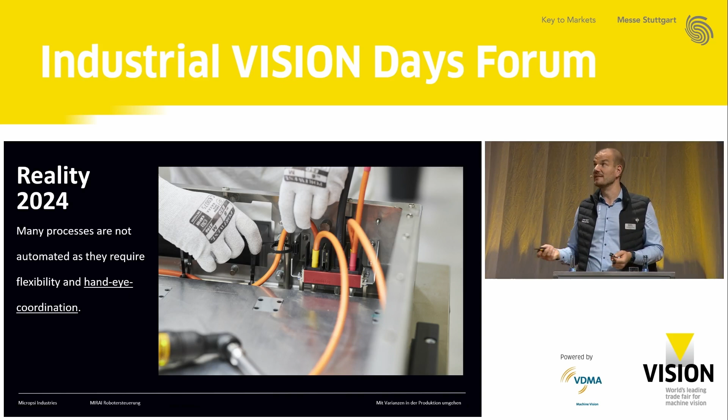How do we call our solution? Mirai. Mirai, in many Asian languages, means something like the future - different pronunciations, Mirai. But what we call it, why we call it Mirai, is because it stands for Micropsi Industries Robotics AI.

What you need is a robot, some kind of a vehicle - we need a 6-axis robot. We also need some cameras for input of the signal, and the signal for us is the camera image. And then you have the end effector, depending on the application.

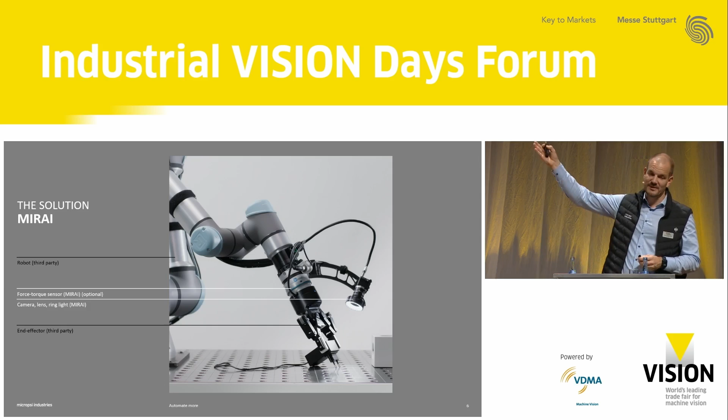Why do we call it autonomy within bounds? Because we want to make something which is still controllable, so you still have control over what's actually going to happen with the robot, because AI for many people is still a term which might frighten them. It's not very specified. What does AI actually mean?

So we do this within bounds because we want to control the training. The training of the skill, we call it a skill, is in the end the ability, needs to be within a certain time frame, and we don't want it to learn something that is not desired, like it could happen in reinforcement learning. So what we do is imitation learning, and it can be very, very quick. Within 15 minutes you can train a skill where later the robot will always find this plug, although it's in a different position.

What are typical use cases? Typical use cases are for us something related with cables, with sockets, cable plugging or connector plugging. Then also insertion assembly tasks. We focus a lot on assembly because in assembly you will often find a part that needs to be picked and then placed somewhere, and that needs to be very accurate.

Rack hanging is something where we also showcase a demo on the other side of Hall 10. Because you might know that there are some companies where some metal pieces need to be coated, need to be painted, whatsoever, and there's a human worker standing, putting metal pieces on hooks. That's also something that we do. It can be even on a slow-moving conveyor.

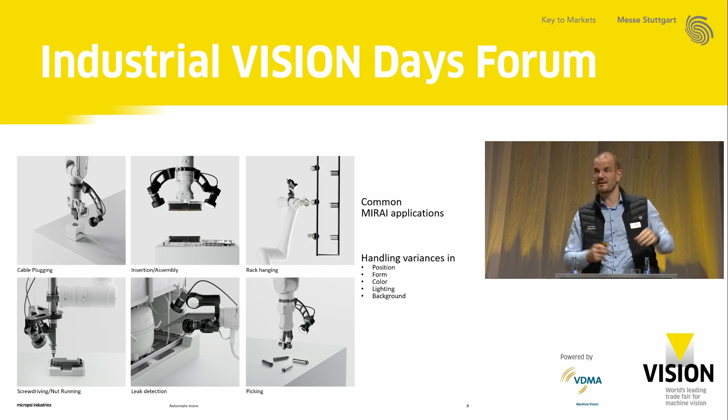All of them have in common that they have variances in the position of the part, in the color of the part, in the shape, in the form, or maybe also in lighting and background. So it's very important. For many vision systems, it's a struggle that lighting can vary. Sometimes there's light coming in from the side, sometimes artificial lighting, sometimes not. We can just train that.

So let me show you some use cases. Time-wise, 7 minutes. Now we have 10 minutes left. I will show you some use cases. That's probably the most interesting.

There should be a video starting, but if not, then we take the next one and we might go back to this. Okay, this is a use case that we have automated for BSH, Bosch Siemens house appliances. You all know a fridge. At the back of a fridge, there's a compressor. In this compressor, there's some gas, and that's necessary for the cooling.

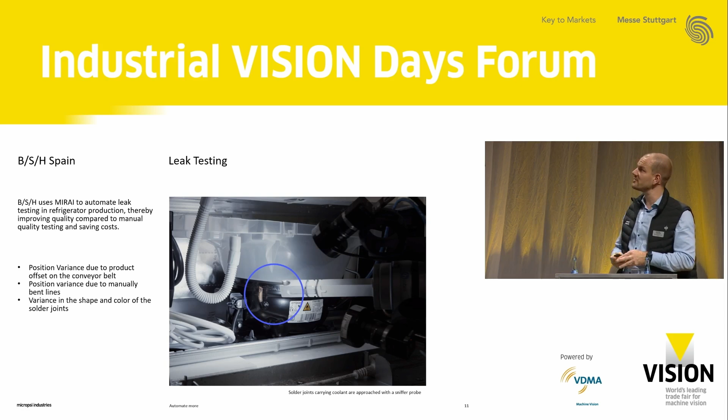And this gas should not leak out of the soldering areas or the crimped areas of these copper pipes. The issue is that these copper pipes are always at a different position. They are soldered, so there's a different color, a different shape also of the soldering area, but that needs to be checked, and it needs to be precise. Right now, there's a human worker standing with a gas probe just checking these spots, but that's very prone to errors and also a very tedious task.

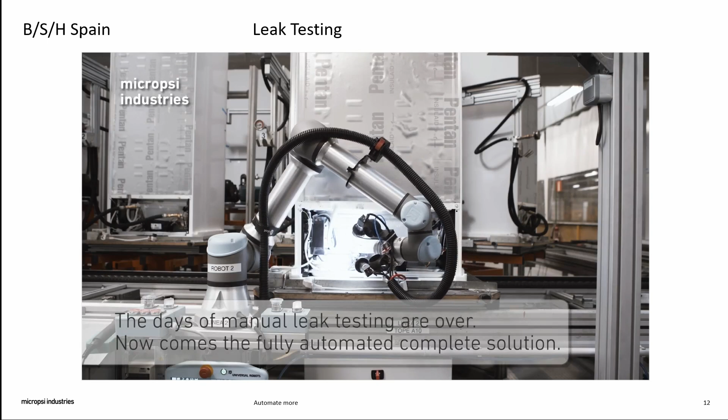So let me play that quickly. I will not play the videos in full length - you can find them on our website. You can see over there a little bit more, but just to give you the real impression. This is how it looks after it's automated, and here it's before. A human worker has to check these spots, but they are always at a different spot. That's why it's so difficult to automate, and companies have tried this with 3D scanning, with other vision technology, but they couldn't succeed.

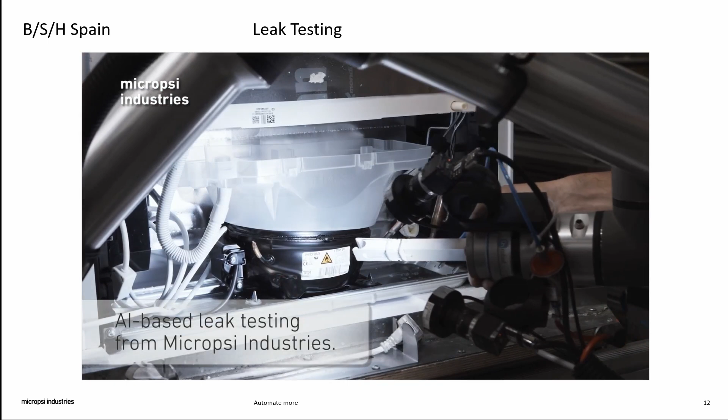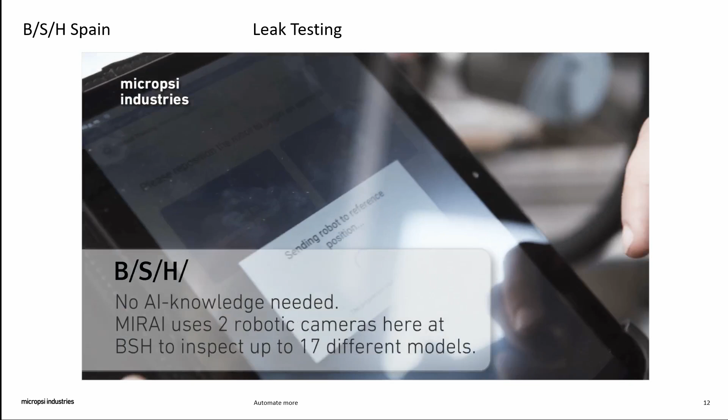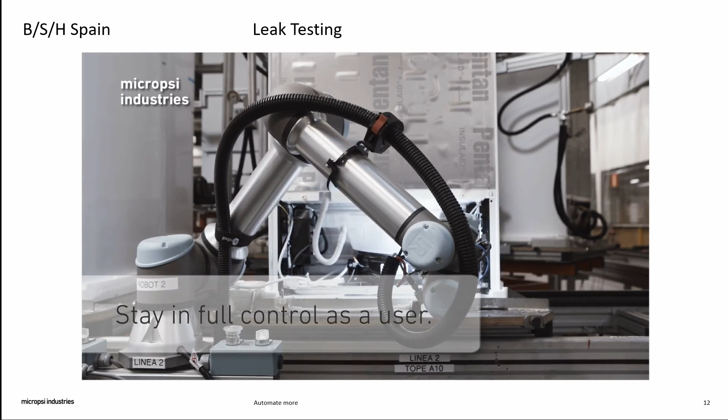Here you see actually a training where the human operator just trains the robot: okay, this is what you need to find, that's the spot that you need to see. After doing this, it now takes them an afternoon to train a completely new application for a new line of fridges. Actually, you see that Mirai is now locating always the correct spot. There's always a handover between the robot, the hard-coded robot system, and then the Mirai part. But this is running 24/7, and now they even find more failures in those fridges. You see that, okay, now we're approaching - this is the Mirai part, finding this spot.

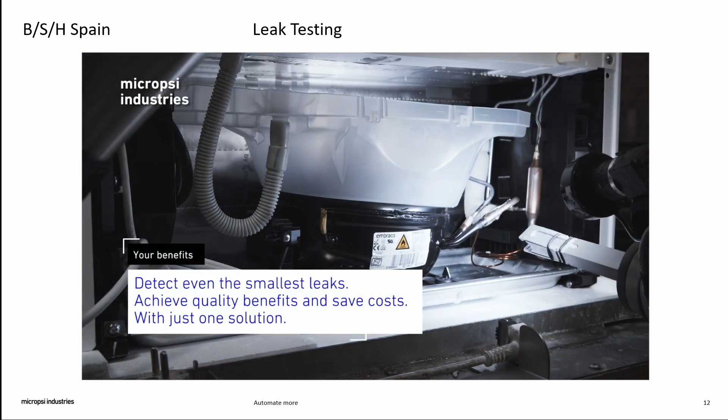And you see it over there again. This soldering area doesn't look very neat. It's always a little bit different in shape, color, and position.

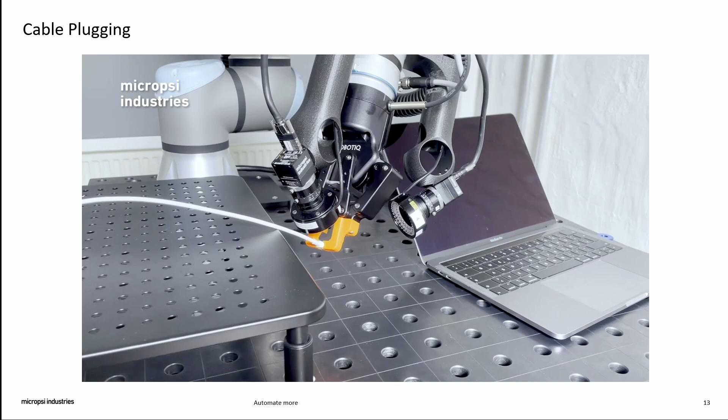Next one, very typical. Often we cannot show the real videos, but Bosch Siemens was so nice to allow us. If I would ask the automotives to show the videos here, they would not be happy. But it's the same thing like this.

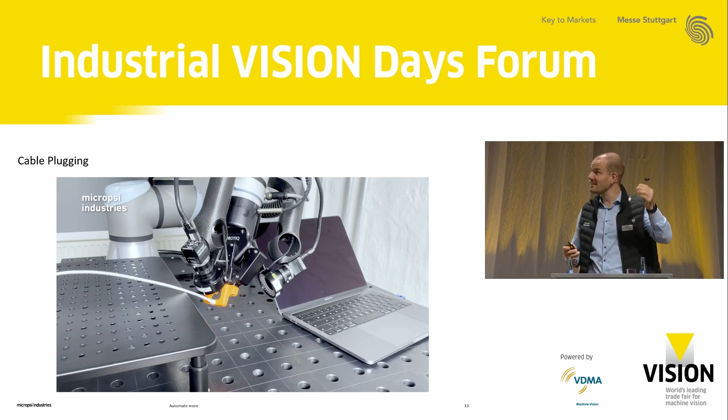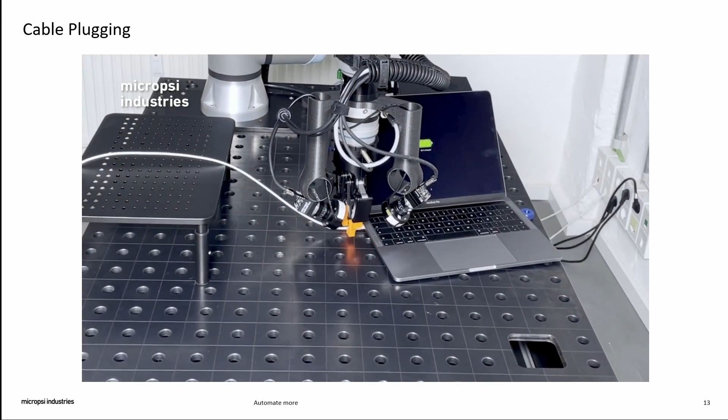Handling a cable, especially a free-hanging cable out of the air, and then inserting it into the socket. Here you see quite nicely that whenever the light is on, we are active. When the light is off, it's just the robot program.

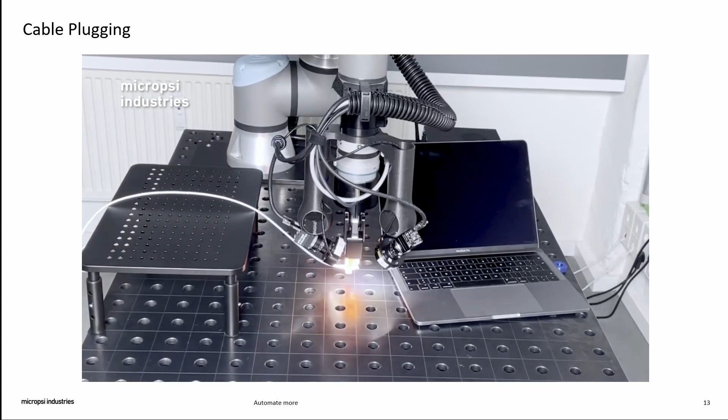So here the colleague is actually pulling away the cable, not because you would do this in a factory, but just to show it's very robust. It doesn't need to be in the predefined position, and then it's also inserted in the correct slot.

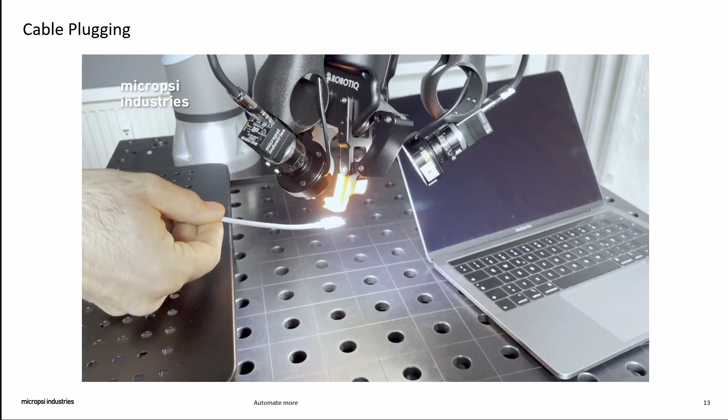So again, here we find the cable until he holds it still, then the robot can actually pick it, and now also insert it. Here the light goes on again, and for the insertion this is also AI controlled.

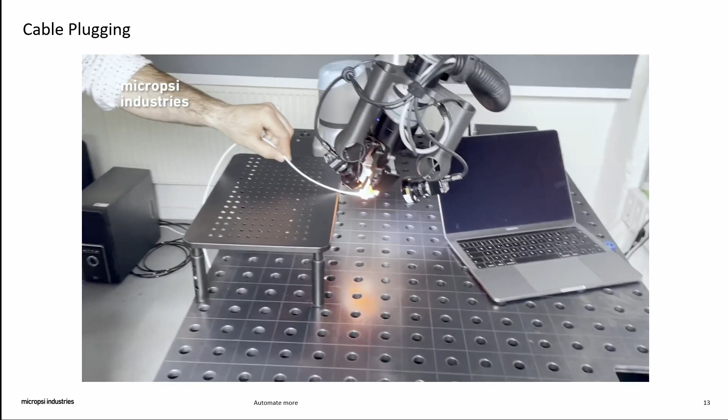The laptop is not standing at a fixed position, he turns it now again just to simulate real factory conditions where parts should be almost at the same spot, but they still might vary a little bit, even if it's just a millimeter. You would need the accuracy to actually insert the cable at the correct spot. That's what we guarantee, that's what we make sure.

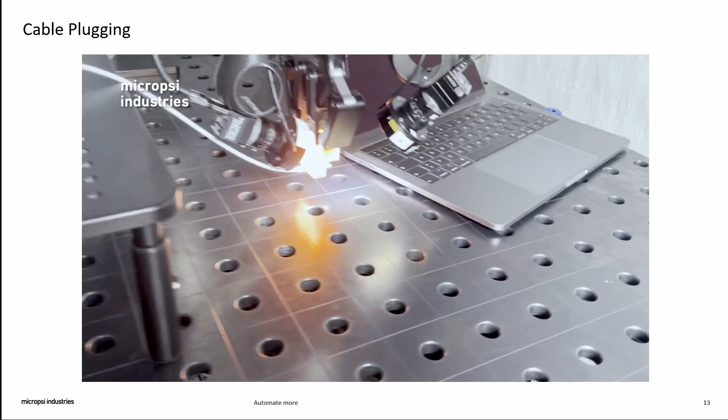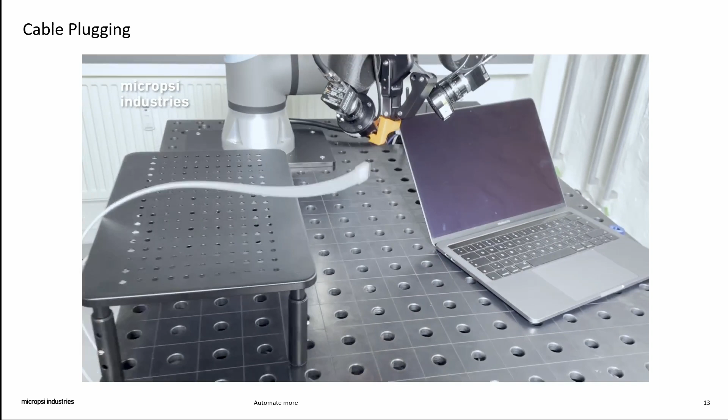One more comment, you see now two cameras. Those two cameras don't create a 3D image or anything, they are just creating 2 times 2D. We work with extremely simple pictures, and all the rest is in the software.

The difference is because we don't take measurements. I can explain a little bit about that later, but the big difference from us to all other vision cameras, at least what we've seen, is that vision cameras always take a measurement. They scan an object, measure it, compare it with the CAD data, and then send the robot to an offset. We don't do that.

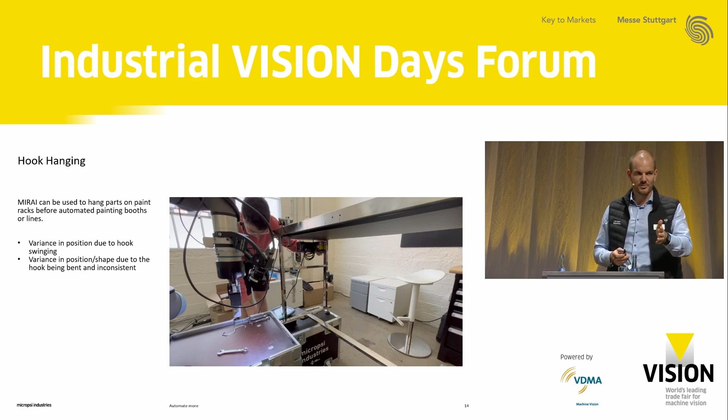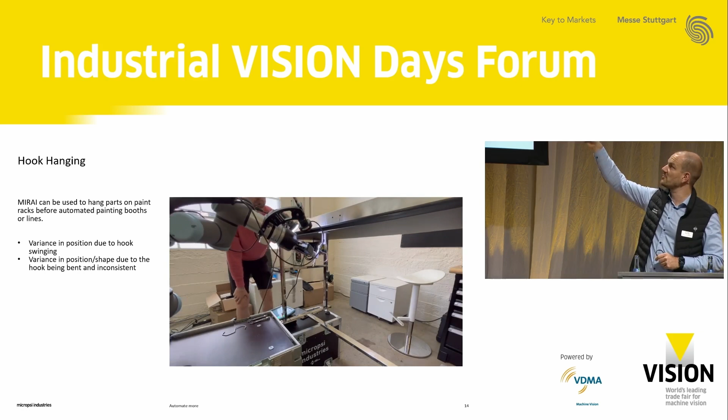One more, hook hanging, wrench hanging, if you want to call it this way. As you see here, the colleague has just simulated a task that we also saw at some customers, and we have a little conveyor belt, and we need to always hang this wrench on the hook.

And by the way, this is now a universal robot. We're also compatible with KUKA robots and FANUC robots.

But just to simulate, the hook can vary, the wrench can vary. We pick it first and also make sure we hang it on the correct spot.

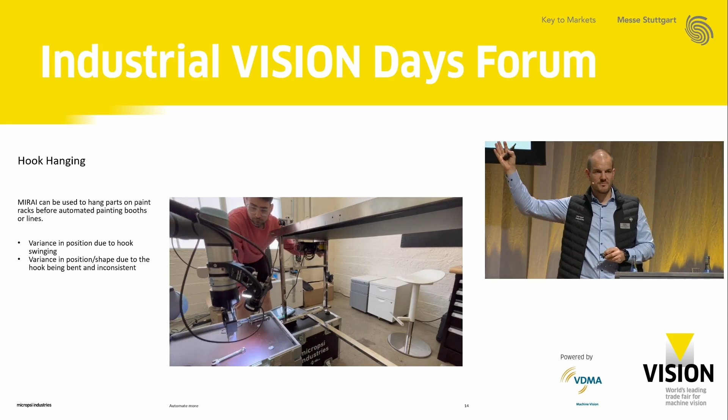And here it's also, again, movement, but there's a real-time tracking, so Mirai, our software, enables the camera to find the object in real time.

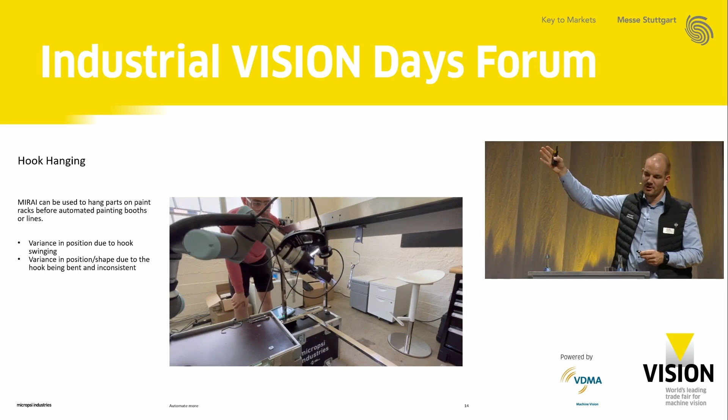And this is done with a very small UR3 robot, so the reach is very limited, so good job from him that he actually managed to complete it there.

Okay, how do we work? What's our commercial approach? Also to tell you a little bit about this before I ask for questions.

We work with a method called customer success planning, so you will never have only the sales guy working with you. If you are interested in finding a solution, you will always have an account manager, that's somebody like me, then a product manager, and also an automation engineer to evaluate the projects together.

We focus on target accounts. We deploy Mirai in production together. We do only scalable projects.

So if you say, yeah, that sounds all cool, I have one robot maybe where I could play a little bit with AI, unfortunately we are too small to do that because we also need to be efficient with our resources. We say, let's find something where we both benefit from. But then if we agree on this, we hold your hand instead of letting you go and try alone.

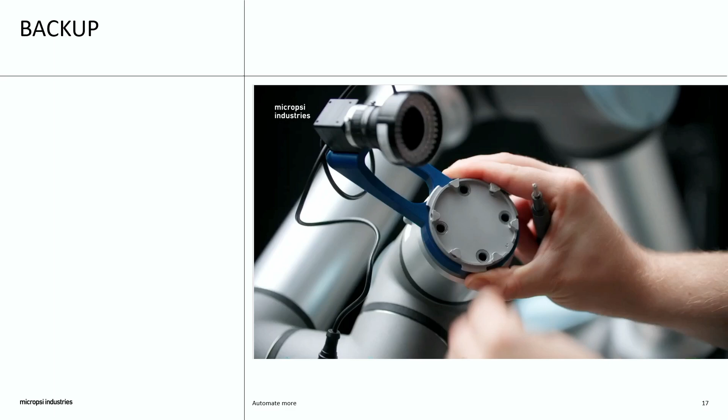The beauty of our system is, you just see this camera over there. It's now a Ximea camera, but we're also compatible with Gig-E cameras from Baumer, for example. We just have a Fujinon lens on it. So if you say, I want to lift a car door, we use a wide-angle camera. But if you say, I want to insert a needle into a little ribbon, which we also do, then you would use a 50 millimeter, or 100 millimeter magnification camera. So it really depends on what you need.

The correct answer is, the accuracy is 1 pixel. Because 1 pixel of the resolution that we see is in the end the accuracy that we can reach, and it depends on how big the pixel is. It also depends on the training. I didn't say anything yet about how we train this, because the training is super easy—it's radically different from what other cameras do. But if you're interested, I can show a little bit more about that at our booth.

That would be really nice, because this is extremely cool what I just saw. There are so many variables as well, so there is orientation too.

So in your laptop and USB cable example, there's definitely an orientation issue. It's not so complicated for a human at least, but the robot could have really done it vertically, or at least tried, but it did not even try. So there's always this.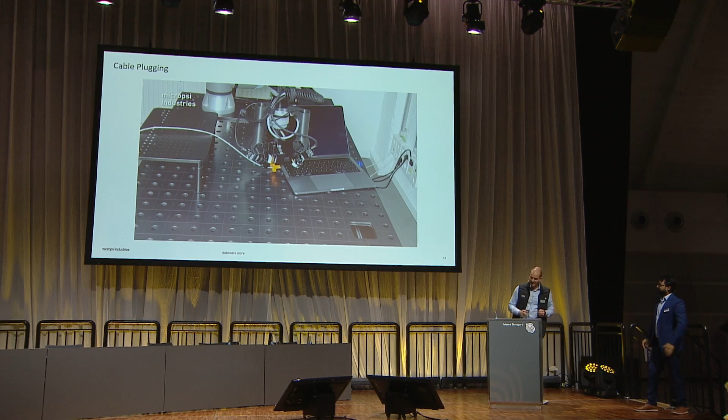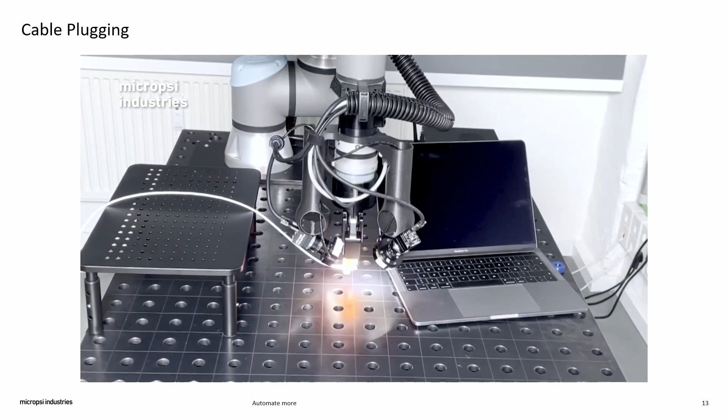Let me explain again that we only take care of a small part, and this is a lot of show. What we do here doesn't really look like production—that's also a showcase to impress people, and then later we tell them, okay, but if we make this production ready, you will hardly see what we do, because it's a very small correction only.

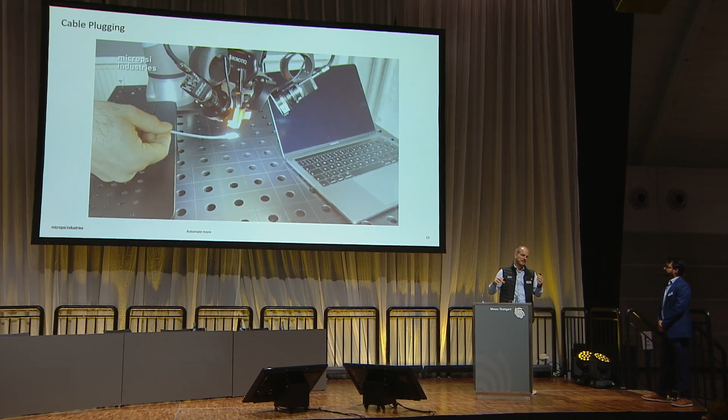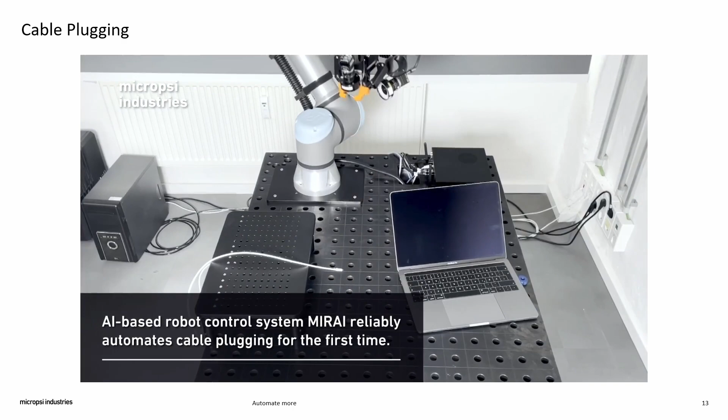So there's always a handover. If I want to pick this, you would know roughly where it is—it's either here, there, or there. So I would have the handover pose here, and then only let Mirai correct this little part, this little correction, like this. So there's only a very small part that we, in the end, actually really correct.

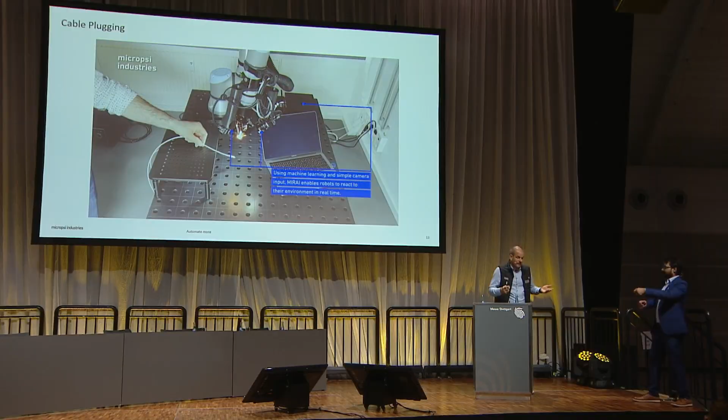Okay, and also at the insertion level—again, it could have. Once you know my target is somewhere down here, and I'm holding this plug now, you will not let Mirai start here and look for it and look for it. That doesn't make sense. You would know, okay, it's somewhere here, and I just let it correct for this last centimeter or couple of millimeters.

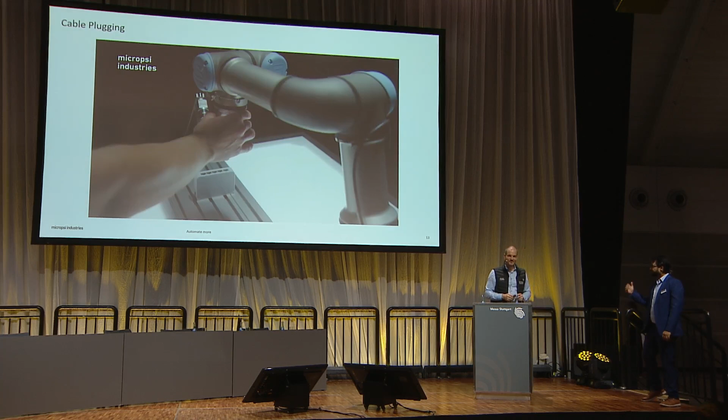I think we still have 4 minutes, and for the live broadcast we really have to start the next one soon. No problem, but I can keep going—this is my field.

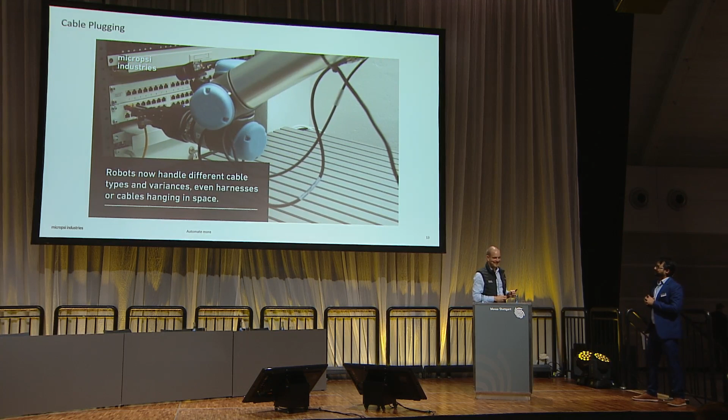I personally work with standards, also OPC UA for robotics is one of the things that I have to do. So this is extremely cool what you guys are doing there, and I'll definitely go to your booth after the show, after this session. But really cool.

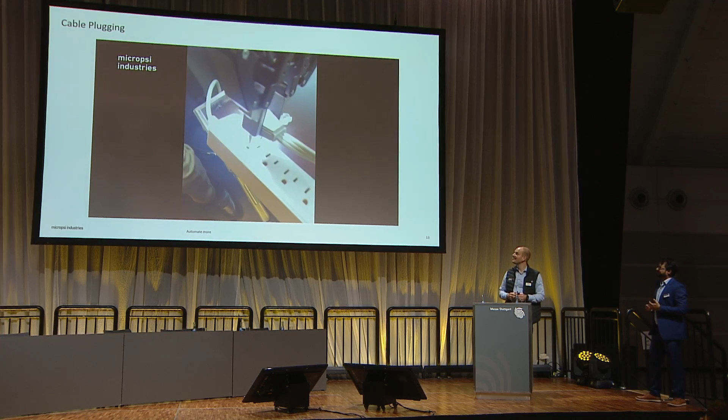But you said skills, right? I've heard the term skills quite a lot. When we talk about skills, is it something that you can just bring together and then just start, or?

Yeah, so we always have, for the robot platforms that we're integrated with—and that's only 3, because that was driven by demand—it's a lot of work for us to integrate, because we need a real-time interface to talk to the robot. We don't just send it an XYZ coordinate, we need to talk to it in real time. So for the platforms where we are integrated, there's for UR, it's called a UR cap. For KUKA, it's called a KOP file. Basically, it's plug and play, so you will not feel as a user that there's a lot of stuff done in the background. But yeah, correctly.

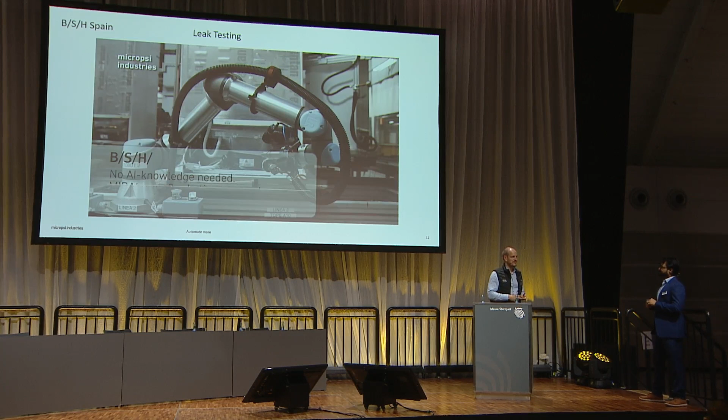So that's what we do. There's a plugin directly. Perfect. I can, if you want, and if there's one more minute to fill, I can actually.

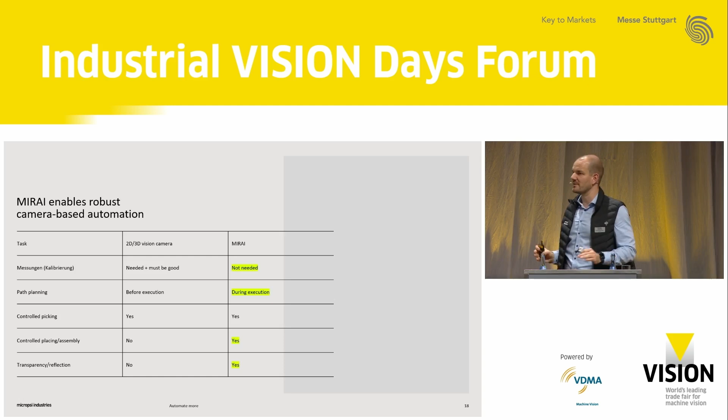It's not a beautiful slide, but I believe it's quite an important slide, showing the differences to normal cameras. I want to highlight again, we don't take measurements. That's a big difference, and it allows us to handle much more complex parts - parts with black on black, white on white, a black hole on a black part, a mirror on a transparent surface, whatever. It really doesn't matter. As long as the human can see it, we can do it.

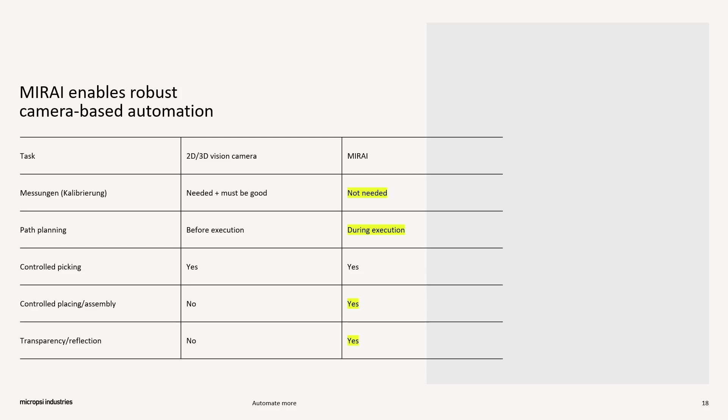We don't take measurements. That's really important to emphasize, because that's the big difference to all other systems. That also means the path planning happens during execution. We only do relative movements, and we can adapt the path while approaching the object. Sometimes it's vibrating, sometimes it's hard to do a good scan or 3D picture of such an object. These are things we can actually take care of.

So should I say more? If you have more to share, you can always share more. So is it based on point clouds then?

No, not at all. We don't take any CAD data, point clouds, or measurements. We just scan the real object as it is. We actually work with very low resolution. The image that we take - usually our users are surprised, they say, okay, that's the image you work with and you can achieve this accuracy? It's 300 pixels by 250 pixels, so it's really, really small, but it's still enough for accurate execution.

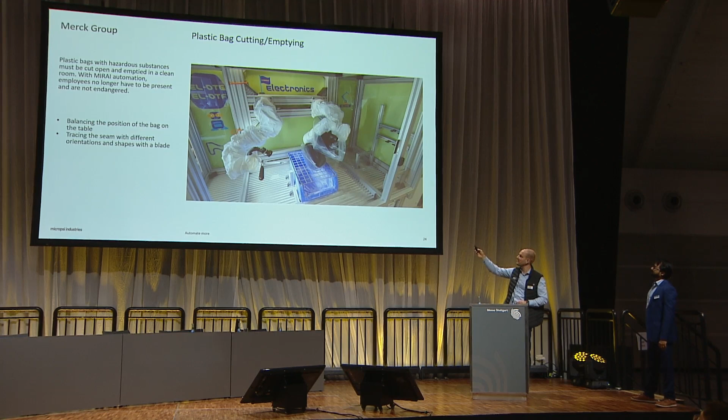I can check what else. I would have some more examples here. Oh, why is there no video? There would be more - contour following, following the contour of a sealed bag, for example. It's not playing right now, unfortunately, is it? Ah, it is. Nice. I will just show you some more until you say the time is up.

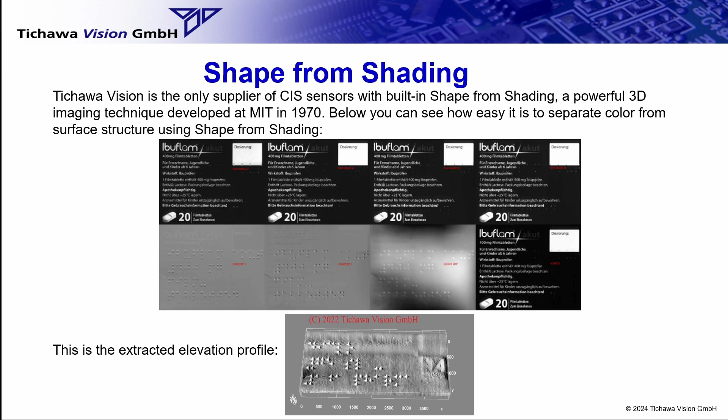If you apply standard algorithms, then you get a gradient X image, a gradient Y image, a height profile, and an albedo profile which contains color information but no 3D information. The image on bottom shows the extracted height information converted into a 3D view.

So you can really extract any tactile phenomenon, like here for blind people. Banknotes must be recognized by blind people. A pharmaceutical package must be read by blind people. And these tactile features required for blind people can be brought out very clearly using shape from shading.

Okay, last foil is the Bergkristall sensor, as you will explain later, has also been designed for hyperspectral imaging. If we combine - the Bergkristall chip supports 48 active video rows.

Combined with a dispersive element - it could be a prism, could be a grating - the sensor will deliver spectrally resolved lines. Due to the high speed, we can deliver 20,000 full spectra per second, meaning we can run 20,000 spectra per second. With 300 dpi resolution, this means we can do inspection at 100 meters per minute with full spectral resolution.

To handle the bandwidth, we will include a converter that's customer programmable inside the sensor and deliver only the true colors red, green and blue. So again, data reduction at the front end.

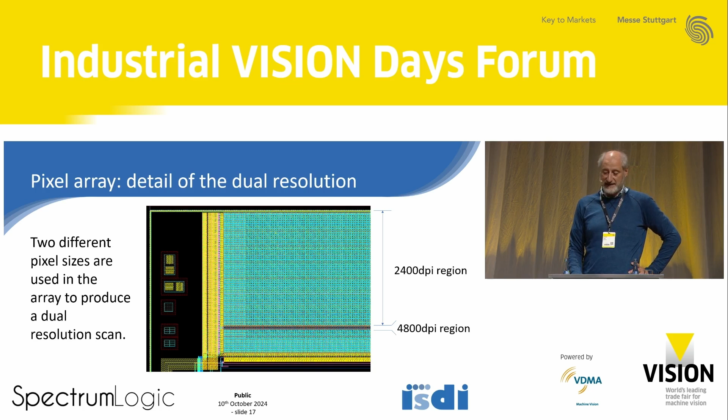How did we implement the dual resolution? This is a zoom in of the pixel array on one corner of it. We have a region where we implement the 2400 dpi resolution, so this is 10 micron pixels, and we have a region where we implement the 4800. They are interleaved, so they are supposed to get exactly the same alignment, exactly the same image quality, exactly the same lighting.

The pixel we used is kind of standard, just slightly different from a 4T. It's a 5T, where we allow also the reset of the floating diffusion of the photodiode itself, so that we are sure that we can keep a row in reset constantly, that doesn't get any bleeding to the neighboring rows. And we can implement a rolling shutter and global shutter as needed by the application.

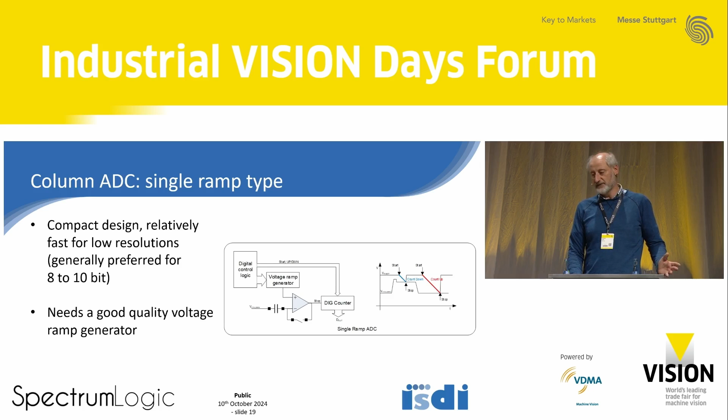The ADC, to go a bit into detail, it's a single ramp ADC, so it's normally used for, let's say, no extreme resolution, 8 to 10, 11 bits or so. You use ramp ADCs: first you convert the reset level, then you convert the signal level, the exposed level, and you do the difference between the two, which gives you a digital CDS. Or you can do analog CDS in advance, so you sample the value of the reset, subtract the value of the signal, and convert that directly. So all these modes are supported.

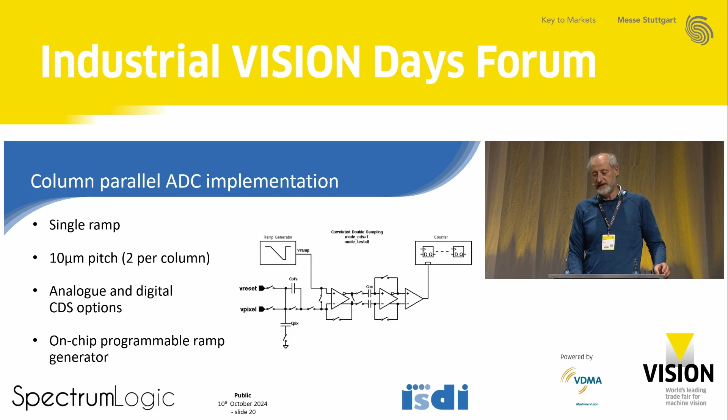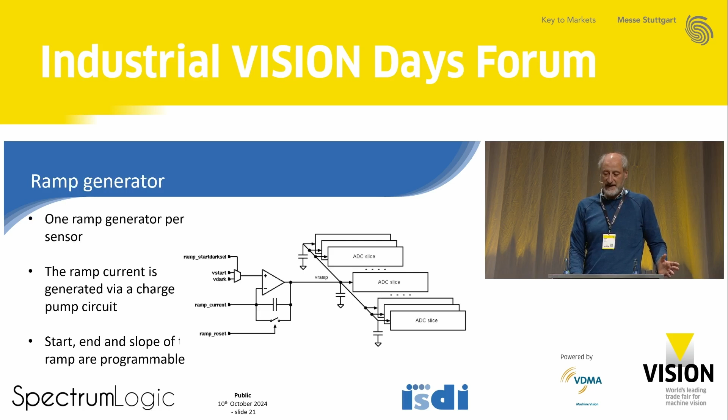The ADC is implemented in a 10 micron pitch, so we use 2 ADCs per column, and this ADC is able to implement both digital and analog CDS, using a programmable ramp generator that is common for the whole array. There is a single ramp generator that runs through all the ADCs, and it needs to be quite precise to program the start and the end of the slope.

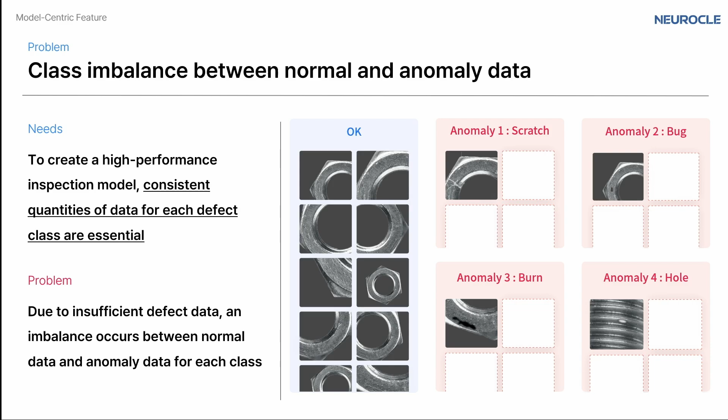In some cases, a certain type of defect might occur only once a year, or once every 6 months. In that case, we cannot train on those defects, which means we cannot train well-performing deep learning models. So we have to solve this problem.

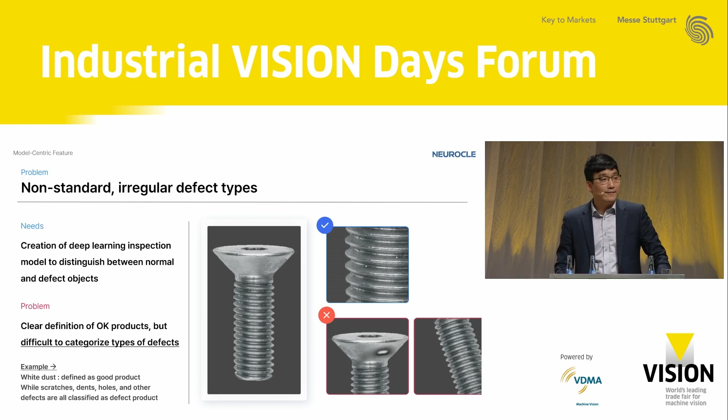Normally, if you only have regular types of defects, you can go with the conventional rule-based algorithm. But the reason you want to apply deep learning is that there are so many non-standard and irregular defects. To solve this problem, we need anomaly models.

Normal models, what we call supervised learning, train on both normal OK data and NG data. However, for these anomaly models, we only train on normal data. That's why we call it unsupervised learning, or some people say weakly supervised learning. We only gather OK data and train the anomaly models, and then the model will find out abnormal cases. This is a good feature of anomaly models compared to conventional supervised learning.

We provide 2 different types of anomaly models: one is anomaly classification, and the other is anomaly segmentation.

So the result is very similar to supervised classification and supervised segmentation, because anomaly classification shows the heat map, which we can call a class activation map, and anomaly segmentation shows the exact blobs on the defects on the surfaces.

So the good thing about this anomaly approach is you can train even when the defect data is insufficient. You can minimize your resources for model training and image labeling as well, because we train only with OK data, meaning we don't train on defect data. It also minimizes training time, and we don't have to label defects because we only have OK data. So this is another good thing about anomaly models.

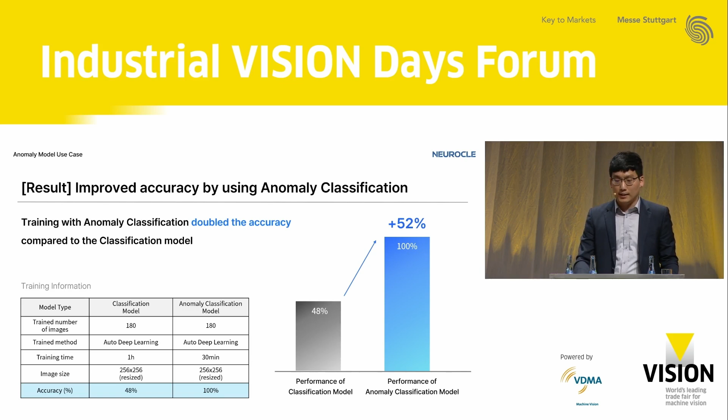The next thing we want to share is the patch classification model. I think you know the normal classification model, but when we train a classification model, the basic unit is just the image itself, so if you're using high resolution data, you have to resize the images into maybe 1024 by 1024. But if the defect is too small, then we lose some defect information. So in that case, we have to think about how to deal with this situation.

So patch classification overcomes this limitation of classification when we are using high resolution data. What we do is divide patch by patch, but internally there's another algorithm to balance things out, even if the defect is located between the borderlines.

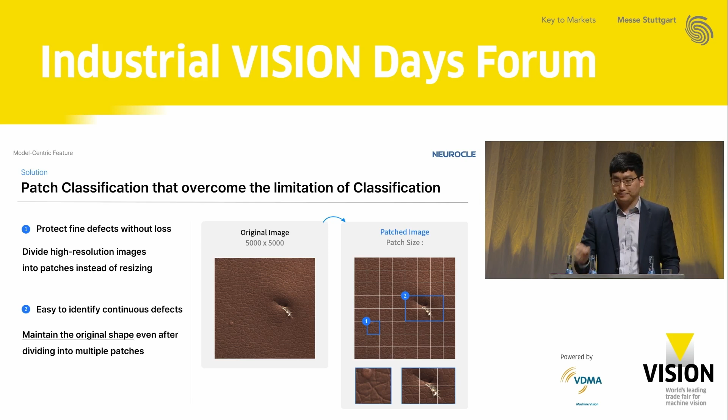So this is how we work with patch classification. You can do the labeling with patches, just click or drag, or you can make it much faster like this - you drag and do the label on the defect patches. And then it's done for your labeling.

So you can do the labeling like segmentation, but it's actually classification. Another good benefit of using patch classification is it's very easy to integrate. Without our patch classification, you'd have to use pre-processing or post-processing to integrate high-resolution data for classification. But this patch classification includes all the pre-processing and post-processing of the patches - you just call our model and get all the results at the end.

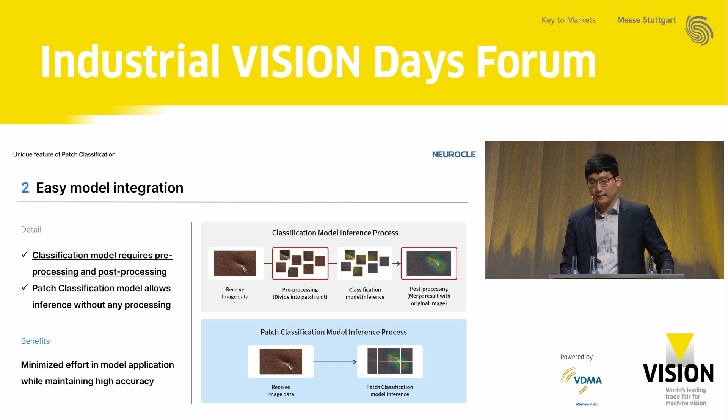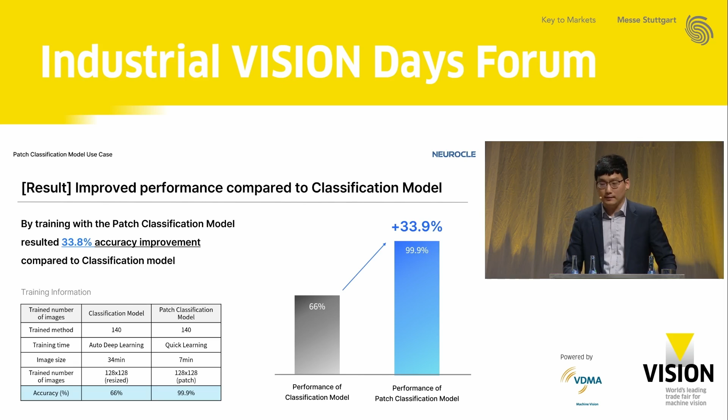We also have many use cases, because if you're using high resolution data, patch classification is very useful. One example is detecting wire defects, where they want to use a very high resolution camera, like a line scan camera, to detect defects on wires. The wires are in a strange configuration, so we cannot use segmentation - we have to use classification, and patch classification helps a lot. Thanks to patch classification, we increased our accuracy from 66% to almost 99.9%. There are many use cases with the line scan camera using our patch classification.

So I just talked about two model-centric features: one is anomaly models, and the other is patch classification. Let me move on to the data-centric features.

The first thing is the synthetic defect image generator based on the GAN model. Why do we need this kind of image generator? Because normally in manufacturing lines, we lack defect data. It's very easy to gather OK data, but sometimes we have a hard time gathering defect data. That's why we thought, why don't we generate defects based on deep learning models?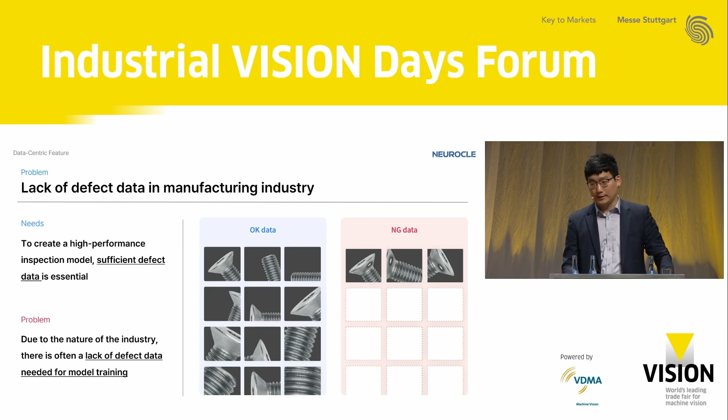So we are using the GAN model. GAN stands for Generative Adversarial Network. In the GAN model there are two networks: one is the generator, and the other is the discriminator. The generator generates new data, and the discriminator determines whether this is very similar to the real data or a little different from it. So the model will find out and create new data which is very similar to the real data. This is how a GAN model works.

To teach some types of defect, we need at least 10 defect data. With 10 images of defect, we can train the GAN model. After you train the GAN model, we can use the OK data and put the defect stamps on the OK images, and the GAN model will generate some new defect images like this one. This is how it works.

Sometimes the GAN model is a bit heavier, since it includes a generator and discriminator, so it's difficult to use high resolution images. So we also have a patch mode for this GAN model, so that even if you have very small, tiny defects with high resolution data, you can use a GAN model. This is another benefit of ours.

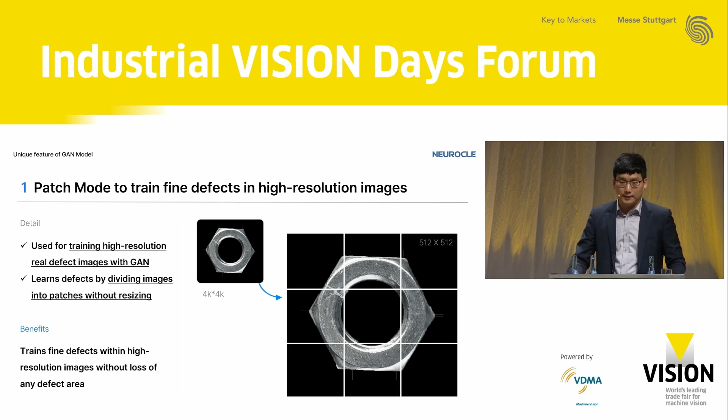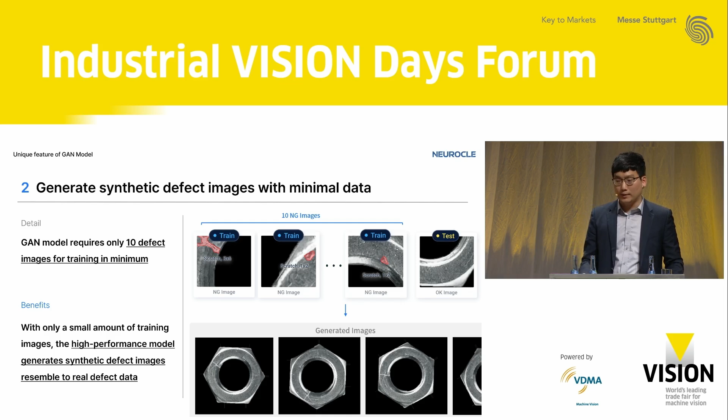Also, as I mentioned, we only require 10 defect images, so you can easily create a GAN model with a small amount of data. We also provide a stamp tool, so you can put these defect stamps on the surface of the OK data. These defect stamps will be very similar to your original defects, so you can easily create very similar artificial defects from real defect data.

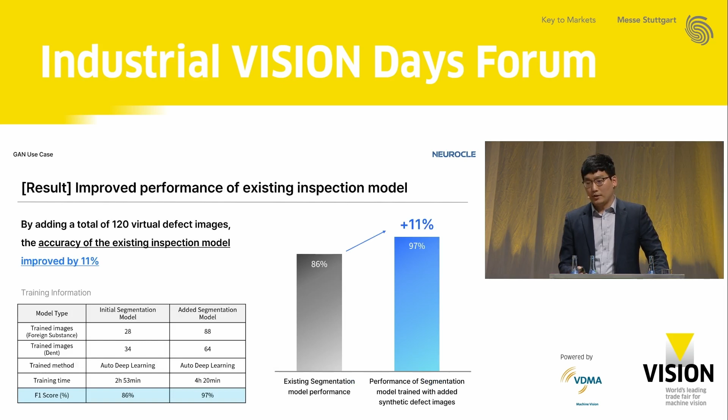So by using this GAN model, we can generate synthetic data. Compared to the initial dataset without this synthetic data, we can improve the model's accuracy up to 97% in this case.

Lastly, I want to talk about some AI-based labeling tools, because nowadays many people are using large amounts of data, more than 10,000 images. In that case, labeling is a very time-consuming job for you. So we invented AI-based labeling tools. There are many of them, like what we call the magic wand, auto-selector, or keyword labeler.

It's based on our foundation model. If you just click and drag, it can easily tell you where you have to do the labeling. I think if I can show the video it's much easier to understand, but if you're interested, please come to our booth and I'll show it later. So auto-selector is like, you just click or drag and the labeling is done automatically. This is the biggest benefit of auto-selector.

We also have keyword labelers. The video doesn't roll again, but basically you just type in a keyword. Like, if I want to find out some drops here, I just write down 'water drop,' and our foundation model will find the water drops in the images automatically. So thanks to the auto-selector or keyword labeler, you can easily do the labeling without any manual labeling tools.